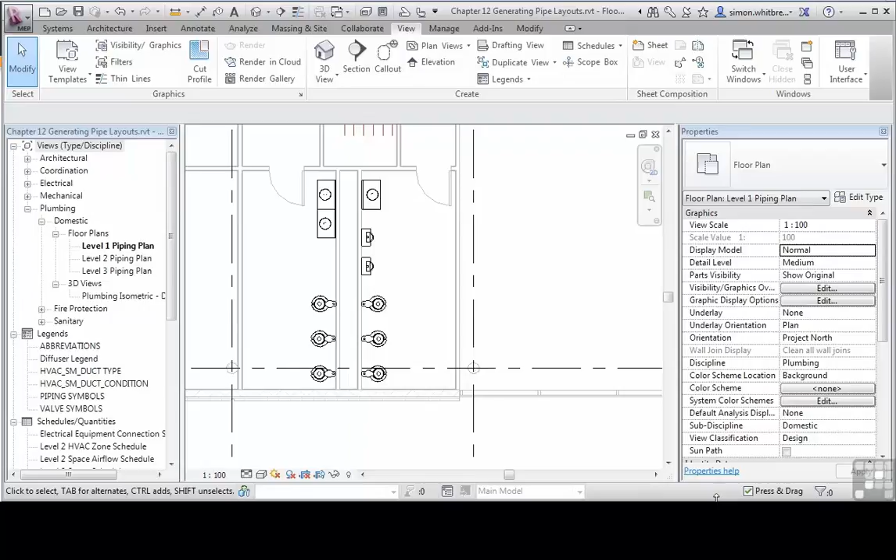For this exercise, open up the file Chapter 12, Generating Pipe Layouts. Ensure that you have Level 1 piping plan open, and zoom into the south side of the building.

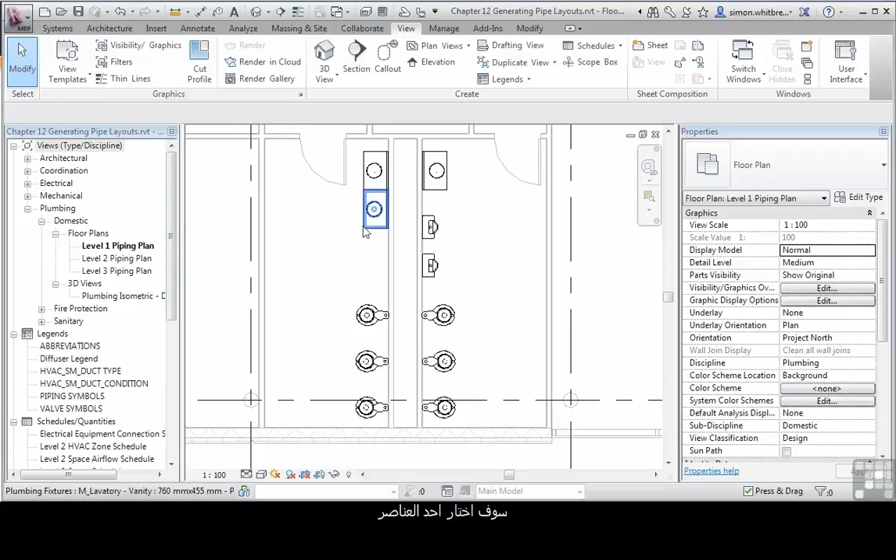Let's start the exercise by generating a pipe layout for our domestic hot water. I'm going to select one of the objects and then, from the contextual tab, click on Generate Layout. I'll select Level 1 South Domestic Hot Water and check some of the settings.

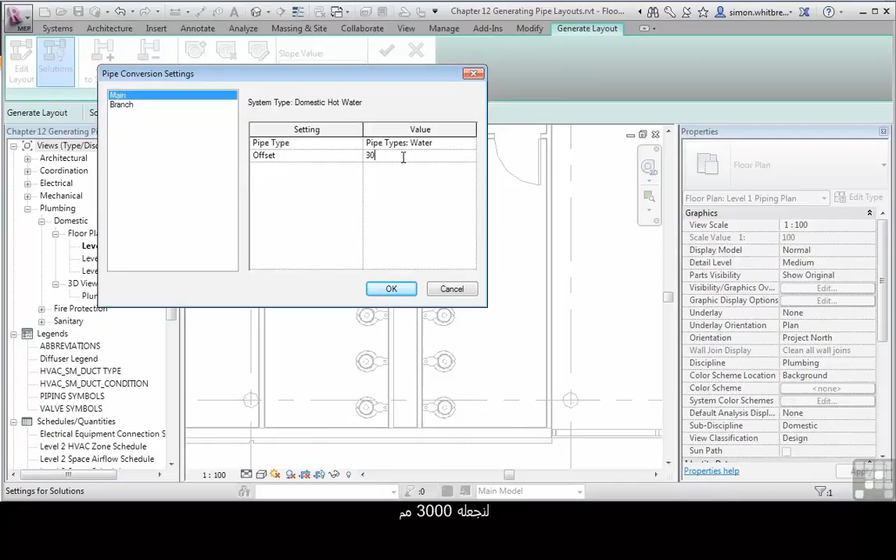I've got my domestic hot water. The main is running at 2750 - let's push that up to 3 meters, and do the same with the branch.

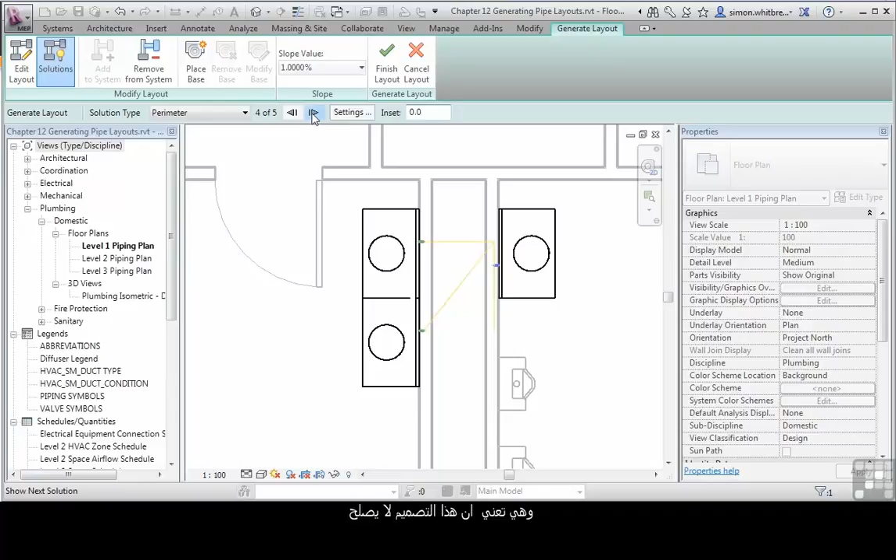Now let's check out our solutions. If the solutions don't work, try the next ones. Where you see an orange line, this means the layout won't work at all. This one's beginning to be a bit more like it, but I still want to make some changes.

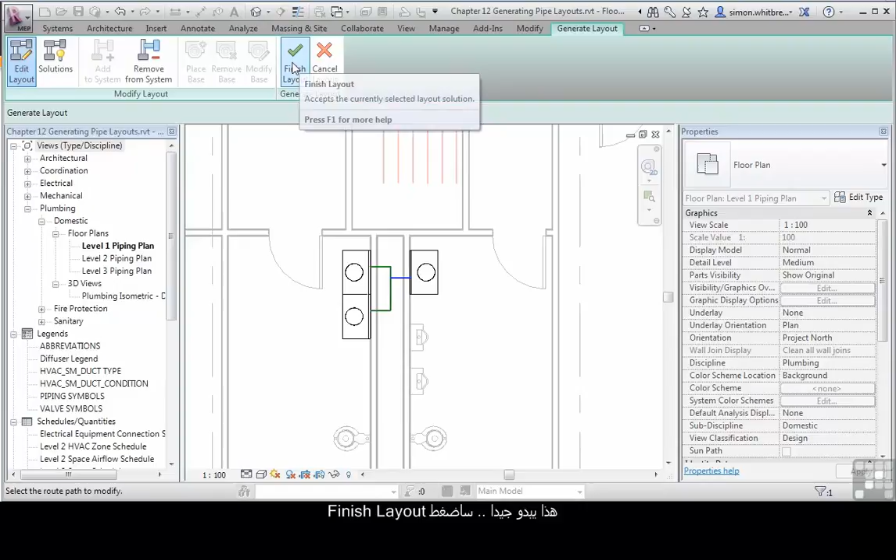So let's edit the layout and select one of the lines. We'll drag those into the middle of the riser. This seems to be working for me, so let's click on Finish Layout.

At this scale we can't really see what's going on, so we need a clearer view of this area. From the View tab, click on Callout. I'm not actually going to use the callout for documentation purposes - I'm going to use it to view the 3D model in more detail.

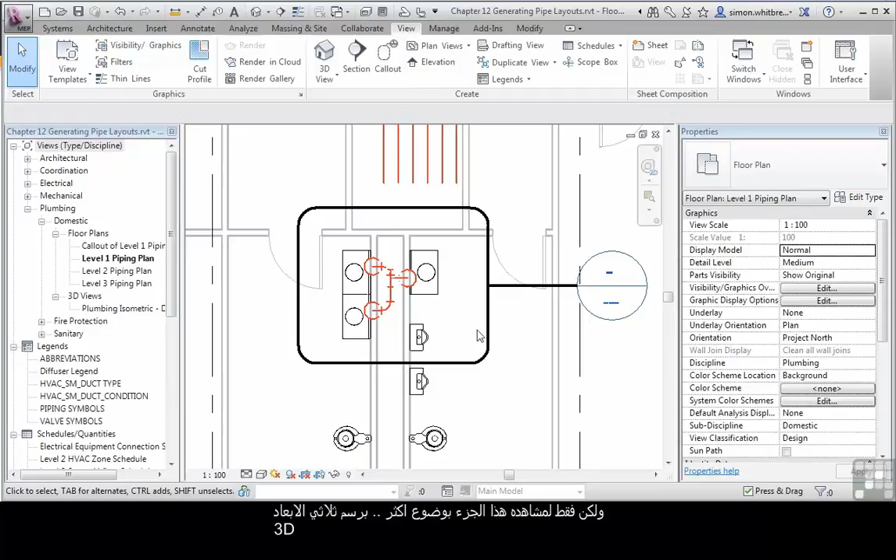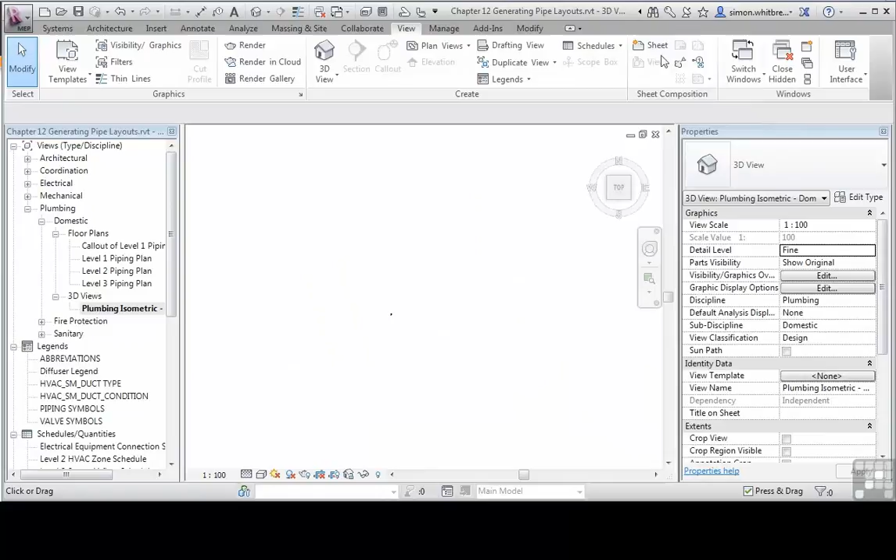I can double-click on the callout head and it will take me to the view. What I want to do here, however, is go to my Plumbing Isometric, right-click on the View Cube, and orient to a view - a floor plan - and my callout of Level 1 piping plan. This has now oriented my 3D view so I can see how my piping layout looks.

I'll possibly want to make some adjustments from here, as this layout is a little bit impractical. Let's go back to Level 1 piping plan and try the same with the waste.

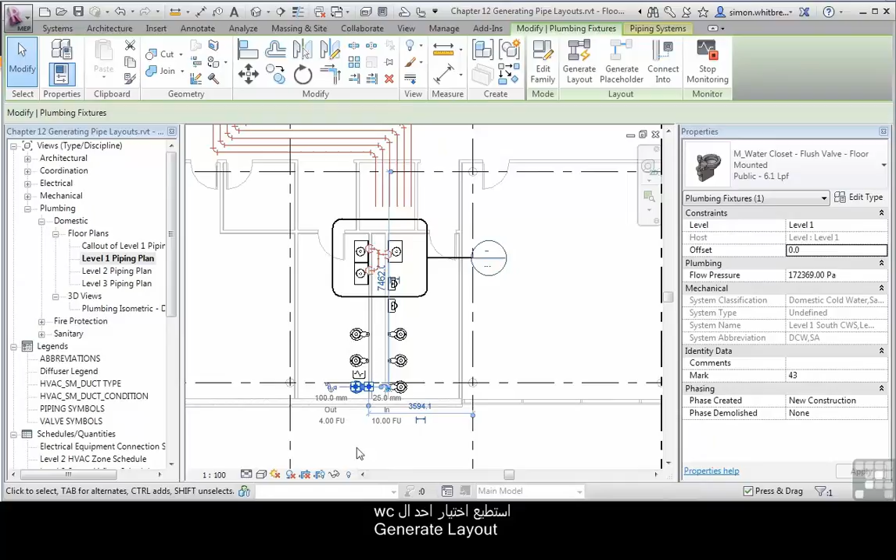I can select one of the WCs and click on Generate Layout. I'm going to go with Level 1 South Waste, and again cycle through the options I've been given.

Just check my settings - let's change these to see if they make any difference, and try the different solutions. None of these really seem to be working for me.

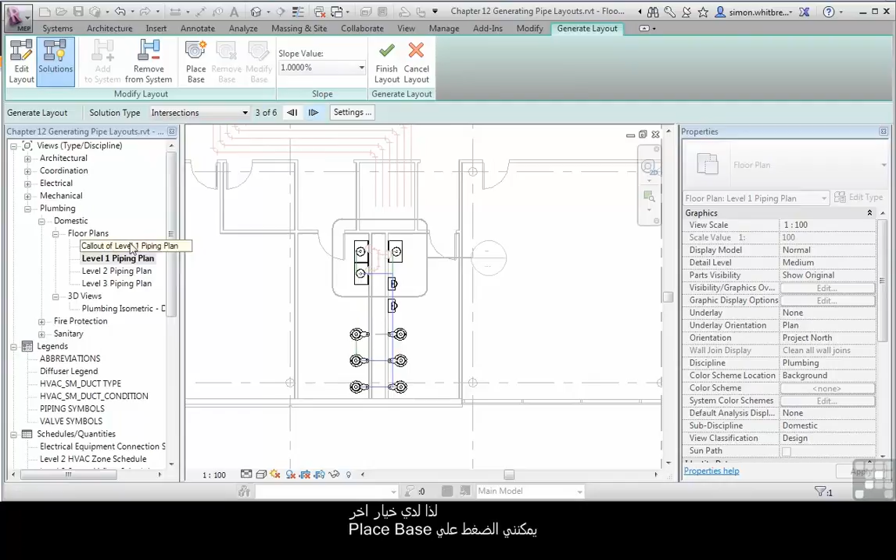So I do have another option: I can place a base. This establishes a source point where my drain will fall to.

Let's put that at the same level as the other pipes and go back to the solutions to see whether this has helped. And you can see that it hasn't really.

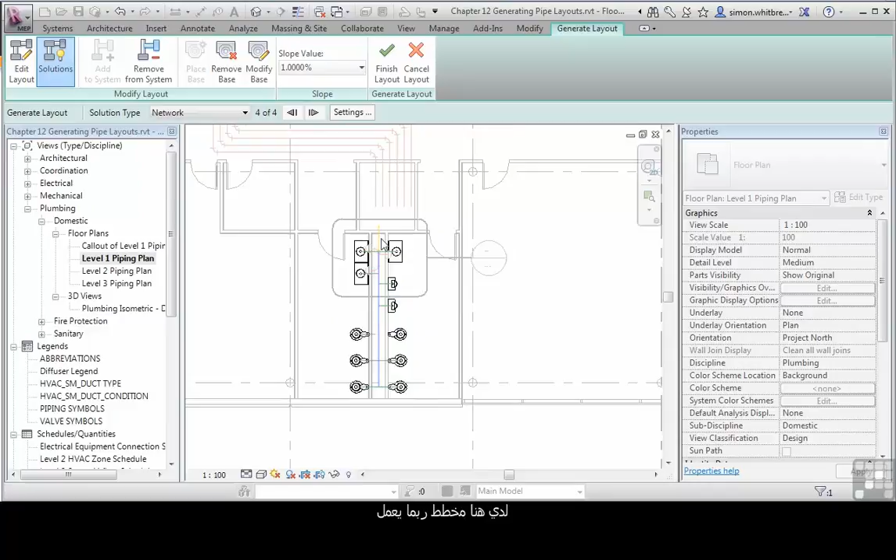Here we've got a layout that may work, but we've got some options with these yellow lines. Let's just modify that base and go back to the solutions.

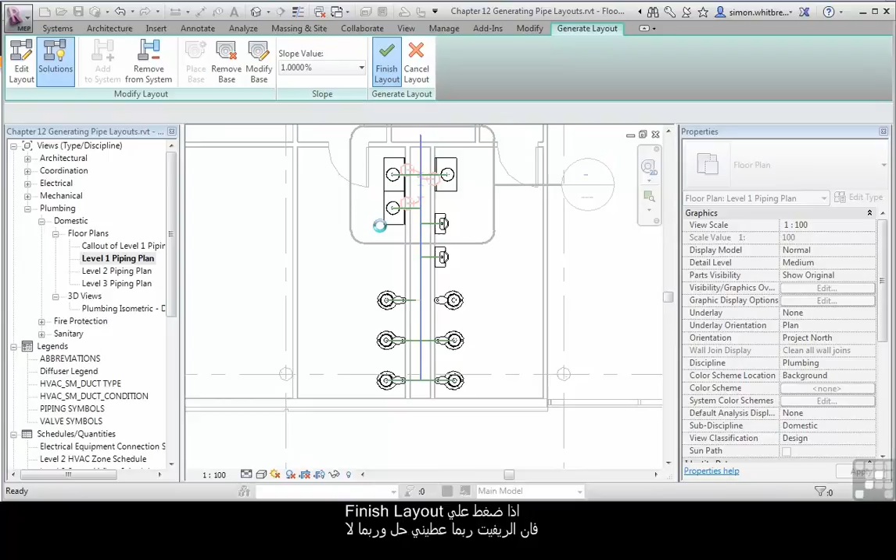Here we may get something that actually works, except I can see a problem here. If I click on Finish Layout, REVIT will give me a layout, or it might not.

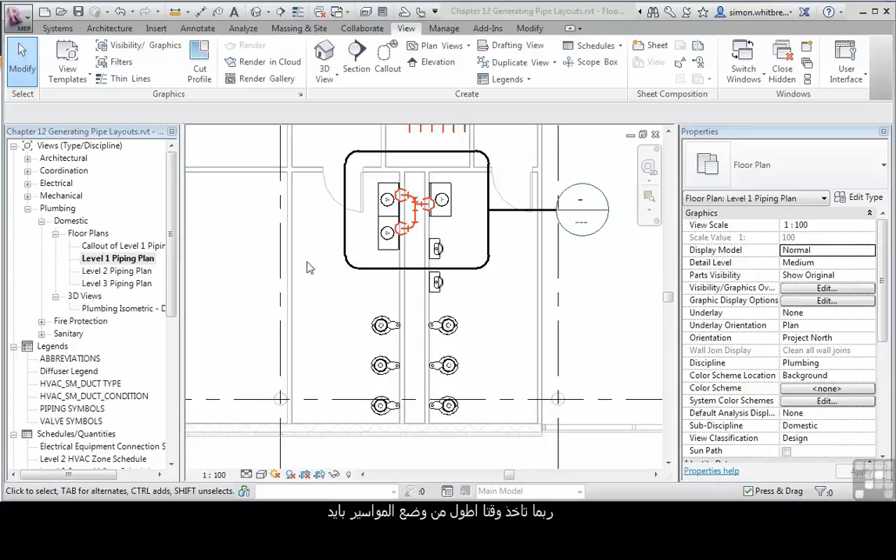The problem here is I'm trying to be too complex. I'm in no way trying to bag the software for not being able to generate a layout for me, but there are certain limits. So really the message here is, by all means use the Generate Layout tool, as long as it's not going to take you longer than putting it in by hand - otherwise you start losing all the efficiencies of the software.